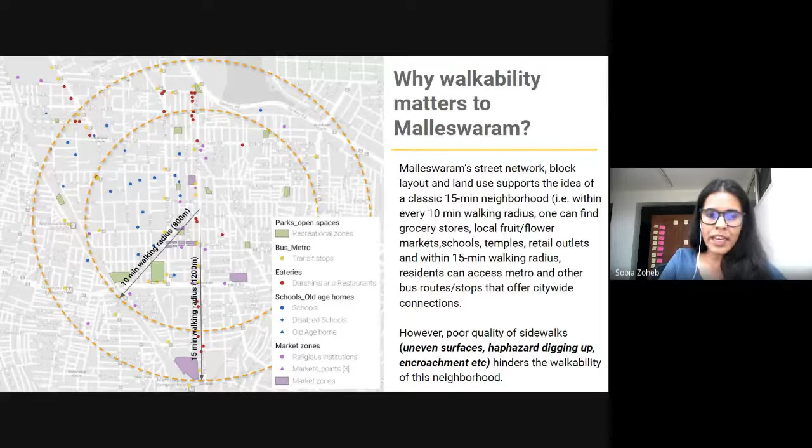Yet we still need to pull out our private vehicles to traverse this neighborhood, only because it's barely walkable. That became a touch point for residents, who started pulling out multiple issues. This happened when we made the proposal, trying to capture from citizens what exactly is going on here and how people are actually traversing.

We realized the majority of people do walk for their neighborhood trips and recreational trips. Yet there's a demography above 45 years old, many of them elderly citizens. So we tried to understand their challenges, and how people actually associate with the streets.

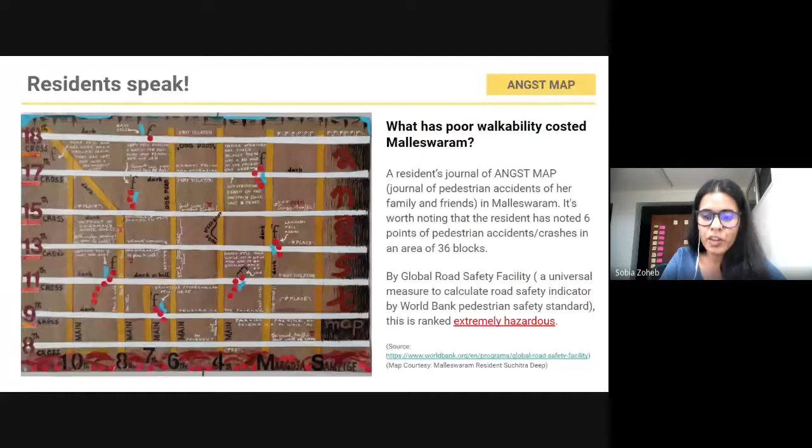This is an angst map done by one of the residents, about feeling unsafe, having pedestrian accidents and crashes across almost every other location, and really high footpaths. From there we went into mapping with residents to understand where this occurs.

As we moved in, we realized Malleswaram had huge potential with the TenderSURE roads meant to come and the existing Conservancy lanes. These bottom two images are of the Conservancy lanes.

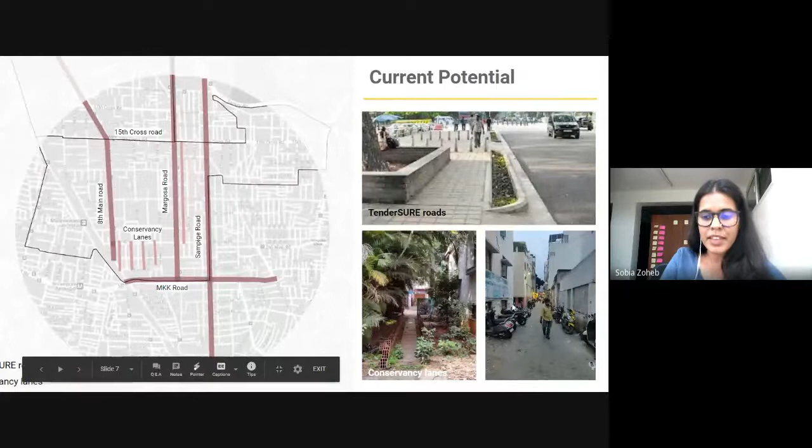We then coined a vision for Malleswaram, where the intent was to create well-designed slow-ways leveraging the existing Conservancy lanes. What you see in red are Conservancy lanes, which can be dedicated to prioritize movement of pedestrians and cyclists within this 15-minute neighborhood. Effectively, we were looking at 11 kilometers of road, out of which 3 kilometers was just Conservancy lanes.

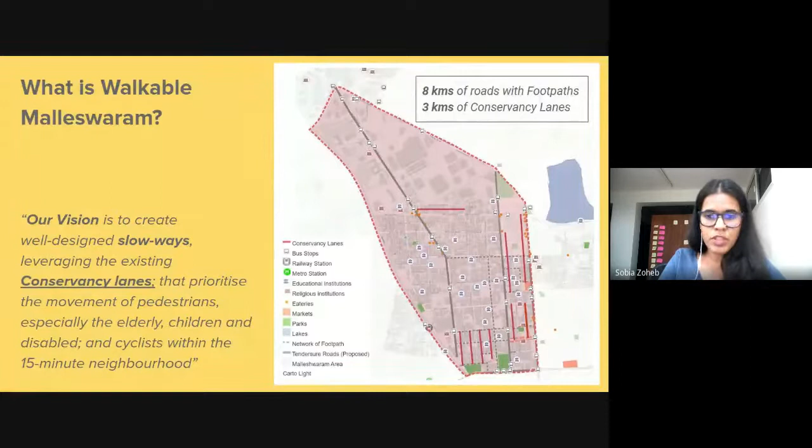We have a live website, and I urge you all to follow the project through that. We've made the project public so more people can get involved. We've just culminated our walking audit and are collating this data, where we had over 60 citizens, designers, architects, and students come map the footpaths and conservancies across the network.

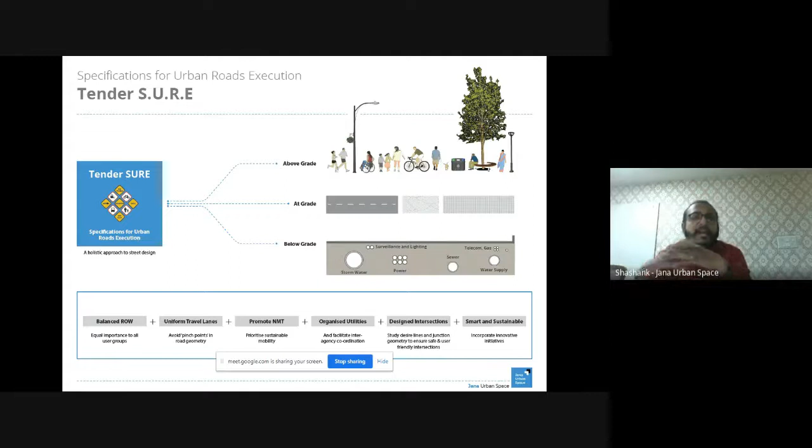What sets TenderSURE apart is that it looks not just at the at-grade level, which is what we call the surface level of your streets, but also at what's happening above it and below it. That's really, I think, what TenderSURE critically solved, which was very lacking in our cities back then.

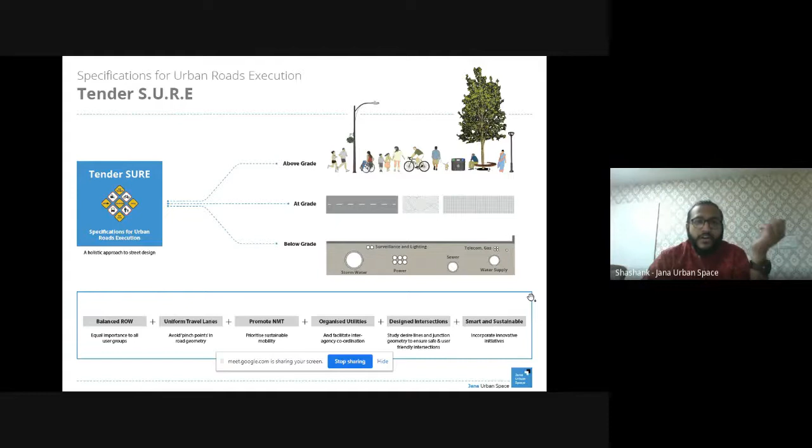We took a six-pronged approach to the design of these streets. The first is to balance the ROW, that is the right of way from compound wall to compound wall, and we want an equitable distribution across that ROW. We do not want what most streets have right now, where cars primarily get dominance. We wanted to rethink that, and in that process give back spaces where we can to pedestrians, cyclists, and other users of the road.

The second thing is to have uniform travel lanes, because one thing we see in Indian cities is suddenly widening travel lanes. It suddenly becomes 3 lanes, then 2 lanes, then one lane. That just doesn't work, because you get pinch points at multiple points in the road, and that funnels traffic into a specific point and causes a lot of traffic jams. So that is another big point, uniform travel lanes.

The third is to promote non-motorized transport, that is your bicycling infrastructure and even new mobility options that are coming about. This is basically promoting any sort of sustainable mobility through the street design.

The next is to organize the underground utilities, which is a big part of what made TenderSURE successful. Right now it's very haphazard. There's no clear definition of what lines go where, and it's quite a mess under the road. If you dig down into any of our roads, you'll find a hodgepodge of utility lines, and even the agencies don't necessarily know where their lines are. So organizing and fixing that was a key part of TenderSURE.

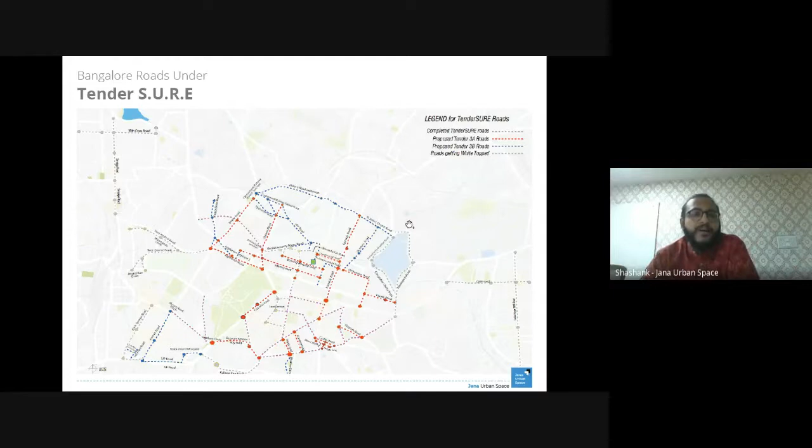Coming to Bangalore specifically, TenderSURE roads are primarily limited to the ABD as of now, but we are expanding actively into other places as well. A big part of what we're very proud of is that we managed to do about 39 kilometers of cycling tracks that go along with these roads.

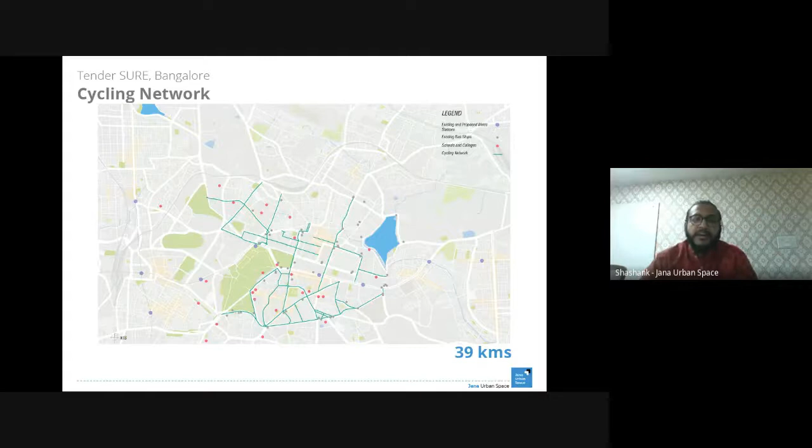There have been a lot of learnings in the process of what works for cycling tracks, whether we can provide it along with footpath users, or do we have to segregate it? Do we put it at the road level or the footpath level? A lot of testing and trying has happened, and we have now arrived at what works best. And of course the key point of what we're discussing is walkability, and the pedestrian network is quite comprehensive. We honestly think Bangalore is one of the most walkable city centers in the country.

You can see that the priority here is giving adequate crossing, providing bollards so that you prevent entry and exit of vehicles onto the footpath, because that was part of the whole learning process we had. We found that when you gave regular ramps leading up to the pavement, you ended up having parking on the footpaths, and vehicles like two-wheelers using it for short bursts. So that's what led to the bollards you see now. In a way, the bollards have become part of the character and fabric of Bangalore, because especially around the city center, even the new Tender SURE roads being done by the BBMP have that trademark bollards on them. I think that's become almost like an identity of Bangalore.

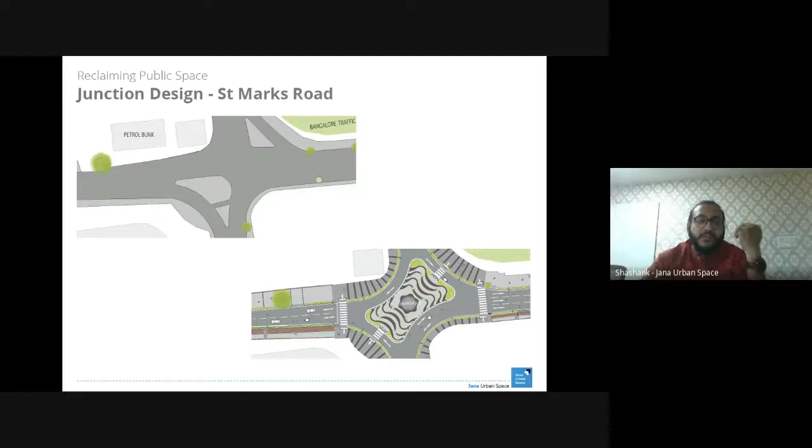Just by looking at desire lines, looking at the way traffic moves, understanding how pedestrians cross the roads, how the various user groups travel through the space, we are able to condense the travel lanes to only the desired parts, and then give back the rest of the space to the city, and create successful public spaces in the process.

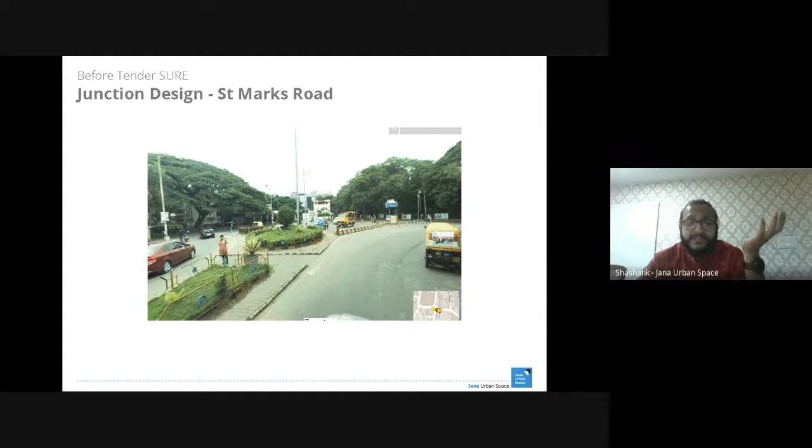So this is what that junction looked like before - it was a nightmare for pedestrians and cyclists in general, and this is what it looks like now, which is a lot cleaner, neater, with a better division of the right of way.

So this is what Tender SURE, the roads look like. Again, there's another example on Residency Road of what the road looked like. You can see people crossing randomly - there is no real division of right of way at all. It's a very inequitable street.

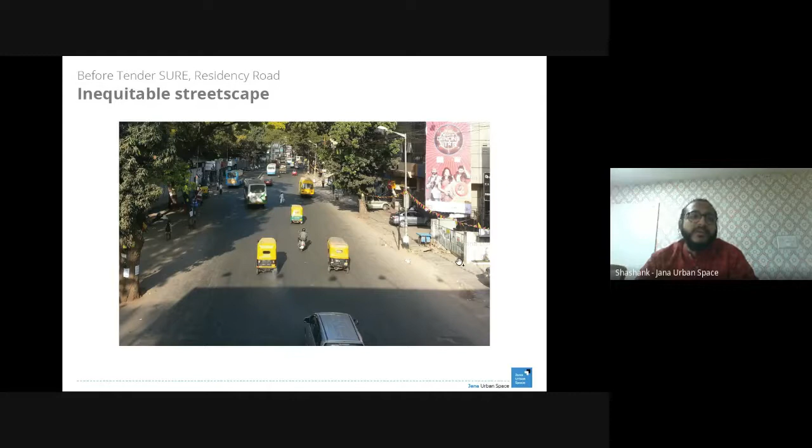And again, the bollards, as I was saying, creating a safe pedestrian experience using those bollards, providing NMT infrastructure like cycle tracks - this is something we're experimenting with. We have done it in the initial Tender SURE Road.

We had done a lot of landscape strips. We are now trying to convert them to bioswales, which basically take in your rainwater and absorb it, letting it percolate slowly into the ground. So bioswales is something that's part of the whole learning and exploration process we're currently working on.

This is another example of reclaiming public space, the cash pharmacy junction, which is a pretty critical junction here on Residency Road. Right at that junction, we realized that the actual path vehicles need to take doesn't require all of this land to be asphalted. So can we tighten that up and create a public space that is given back to the community?

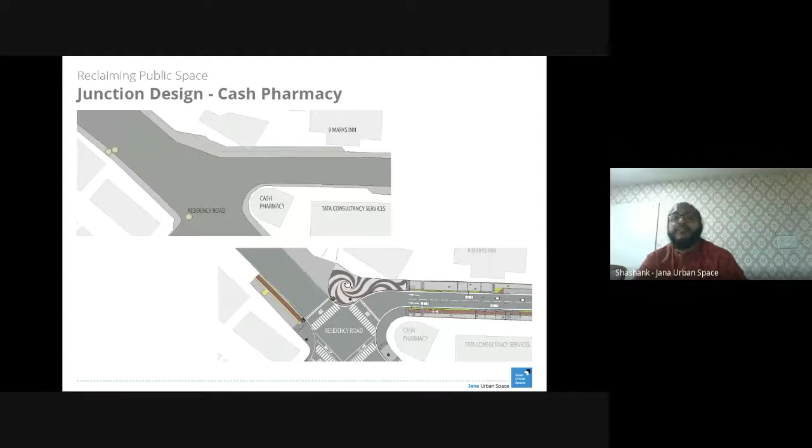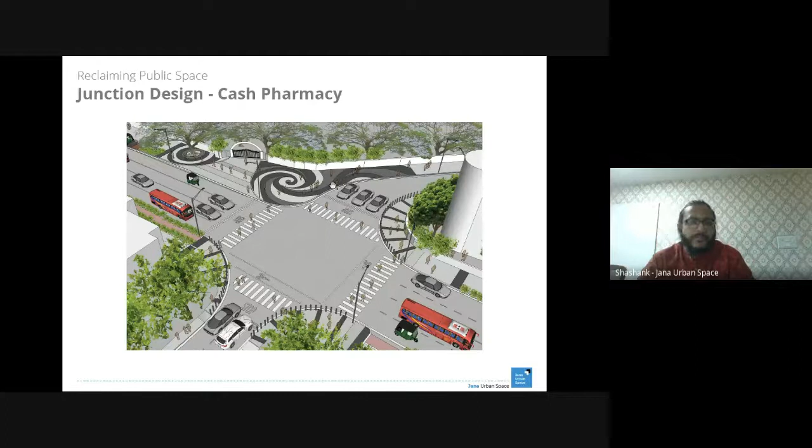In fact, right next to where this public space is, you have a very large school. So we actively wanted to create something where people could use the space outside as waiting areas - that's the school there - and we wanted to create this plaza with waiting spaces for parents, drivers, whatever it may be. So that's what it currently looks like - basically taking away what used to be asphalted and giving it back to the pedestrians.

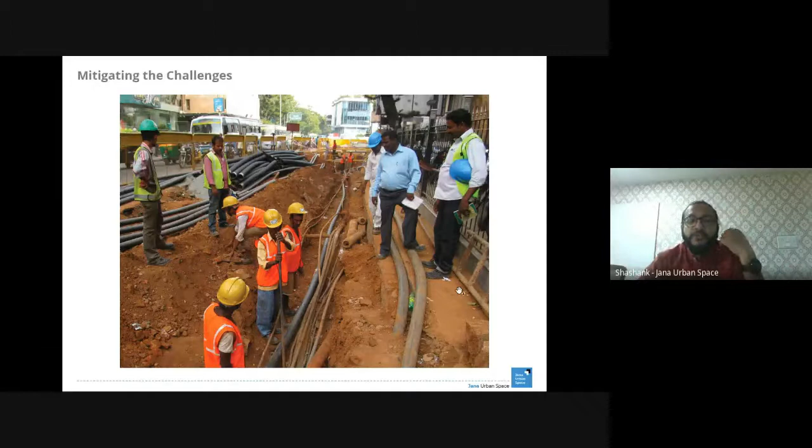So from an implementation standpoint, I'll quickly run through some of the challenges we faced. One big thing is we did not want to make the entire road and right of way unusable during the time Tender SURE Road was being constructed. So we initially did it in segments of 100 meters at a time to try and minimize disruption and allow traffic flow to continue through the road. That was a big challenge, certainly, because it required a lot of coordination with the traffic police and other agencies involved.

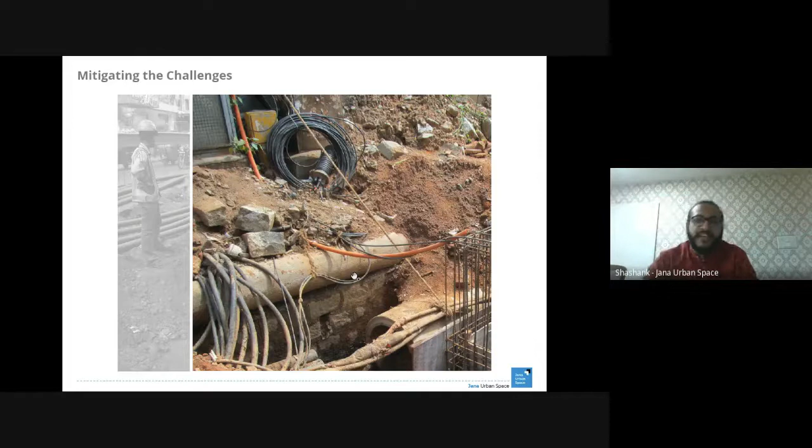This is an example of what I was telling you about the hotspots of underground utilities - everything just goes everywhere underground. They lay it without really thinking of the larger network. So fixing that was a big part of what we did, and this is an example of the cleaned up underground utility network with dedicated ducts and regular inspection chambers. That's another big thing we've done.

And of course, there's a lot of participatory process. This is not just Jana decides to do it and Jana does it - there is a lot of public consultation.

There's a lot of agency involvement. A lot of people have to sign on, get on board, understand what we're trying to do, and be part of the process. It's very rewarding once it actually gets executed.

Coming to some of the learnings, things like we need those bollards. Even for instance, the paver blocks - something we initially did as loose fixed pavers because we wanted it to be removable whenever there needs to be any digging up of utility lines. But what we then noticed is that we didn't actually need loose fixed pavers because we had provided enough inspection chambers for the utility agencies to access.

So we've now transitioned to perfectly fixed pavers, because otherwise we were having this problem of rodents coming beneath the sand and creating channels, and when any of those channels collapse, it affected the pavers on top. So now we've moved the transition to fixed pavers, but almost none of the Tender SURE roads have ever been dug up since we've converted them.

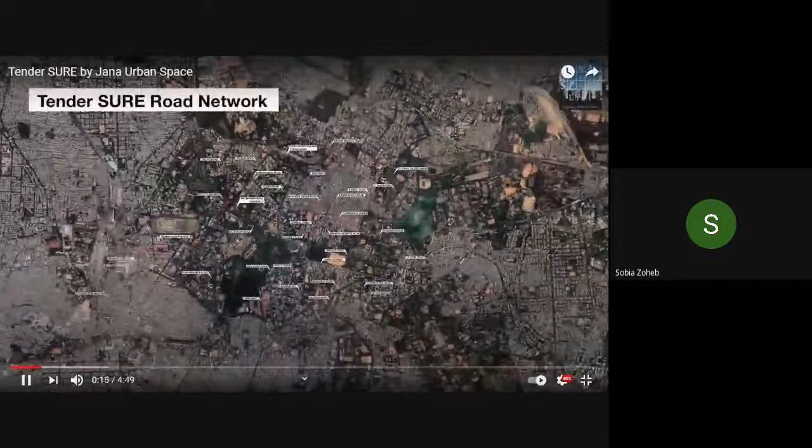Actually, I don't think it's audible. Yeah, he's just checking. Okay, sure. Would you like me to give it a try from here? Sure, please do.

Can you just let me know if you can hear the audio? Yeah.

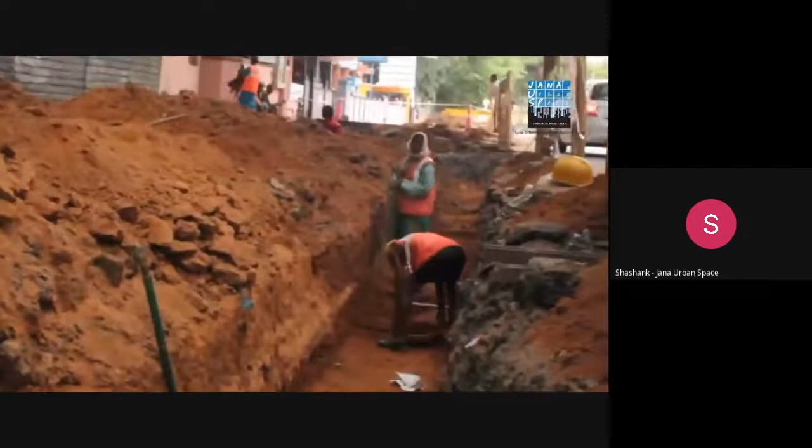The road is actually the conduit for all the other networks which impact my quality of life. That's the underground network which is supposed to collect all the rainwater and prevent flooding. That's the one which brings in my water supply, power, data cables, etc. and carries out my sewage. So the road becomes this conduit which networks the entire city.

But today the municipality comes and lays the road. We have multiple agencies waiting in the background. They seem to wait until the road is laid by the municipality, then come and dig it up, one by one. So you're back to square one. That road, nobody would believe was done 6 months ago. Einstein said insanity is doing the same thing over and over, but expecting a different result.

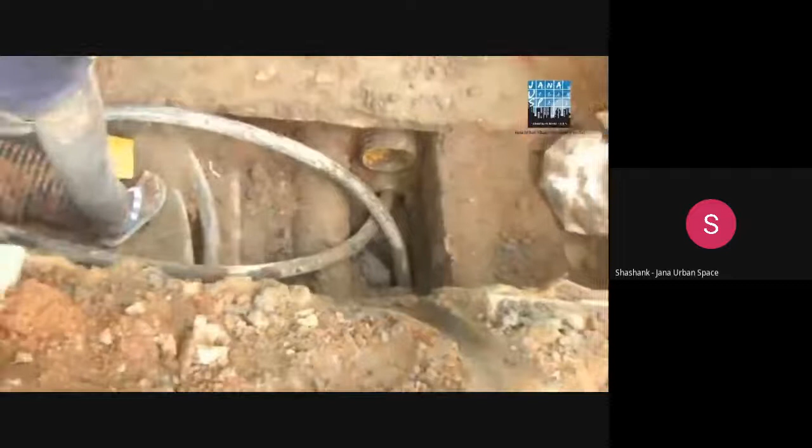Tender SURE fixes the design of the road itself, but also the design of the utility corridors. Every agency has been allocated a utility corridor with regular access chambers under the footpaths. No agency should dig the roads anymore. We started with saying no more of build poorly, cut repeatedly, rebuild poorly. Instead, let's aim for cut once and fix once and for all.

Tender SURE seemed to me a very good thing because for the first time we were looking at urban roads with much higher and better specifications which would be more sustainable. This is change that people can see. It dramatically improves their quality of life. It improves the walkability, revitalizes their neighborhoods, improves safety and security. It just improves the experience of the streets.

I believe that urban India, at least as far as the roads and cities are concerned, should be a completely different picture if Tender SURE specifications and the Tender SURE model becomes the basis for road making. I think it's a big leap forward.

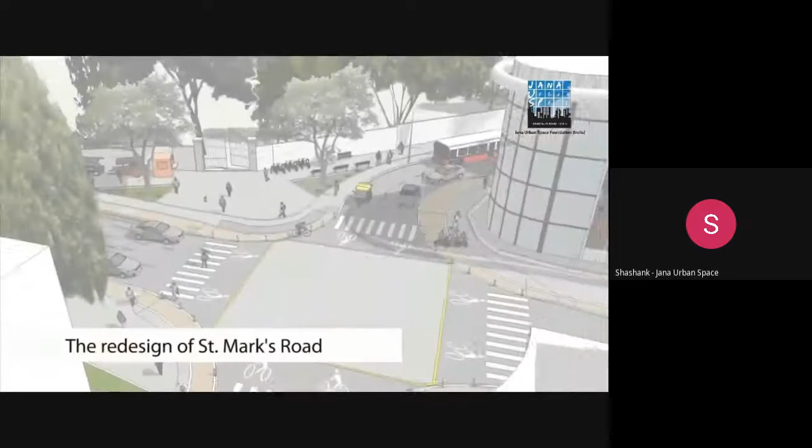Why such wide footpaths? Why has the road surface reduced? Well, it's like Bernoulli's principle. If you put plenty of water in a wide funnel, it will still drip slowly at the pinched end of the funnel. So also, if you let in 100 cars at the widest part of the road, but only 10 can go at the narrowest, we have not eased traffic. We've simply created a traffic jam.

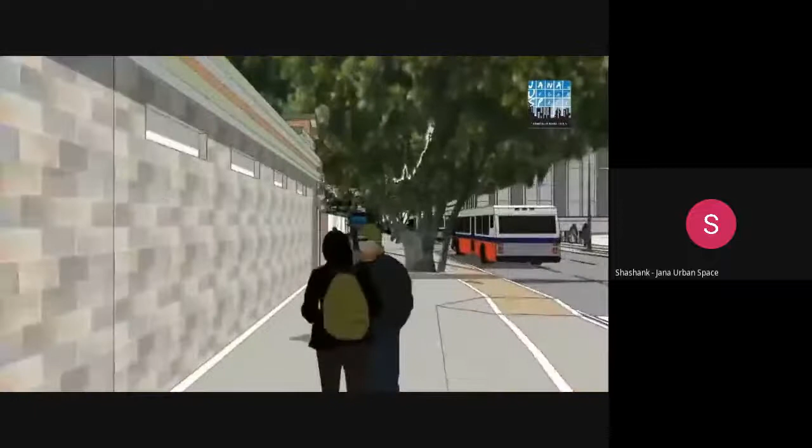Our city roads are filled with such traffic jams. What we have done in Tender SURE is designed for the narrowest part of the road and given the rest for parking, bus space. It has dramatically improved the flow of traffic. And in spite of zero land acquisition, we have protected all the old trees in this project. We have provided space to accommodate the same number of street hawkers.

I'm working as a project coordinator in this project. This project is first of its kind project in India, which has really inspired us, and we have learned a lot of things from this project.

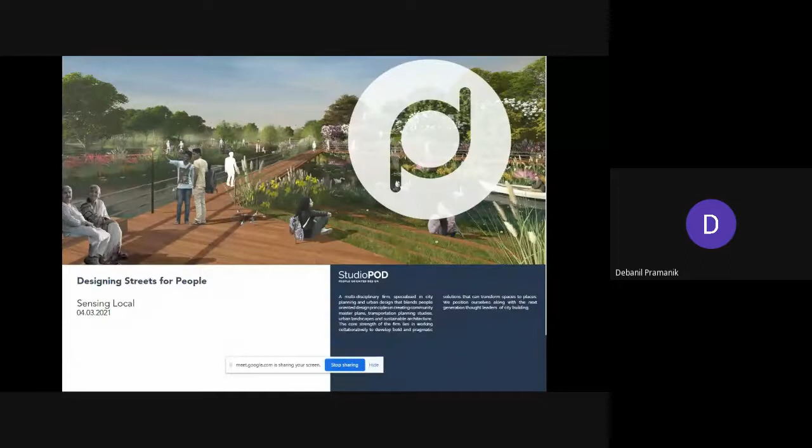So yeah, I'll try to keep it a little quick since it's almost 7 and I know everyone has to get back. With StudioPOD, we are a Mumbai-based urban design studio, and we do a lot of different kinds of urban design and urban planning projects. We also get involved with participatory planning and engagement that informs people about the state of urban planning and the rights they have as citizens.

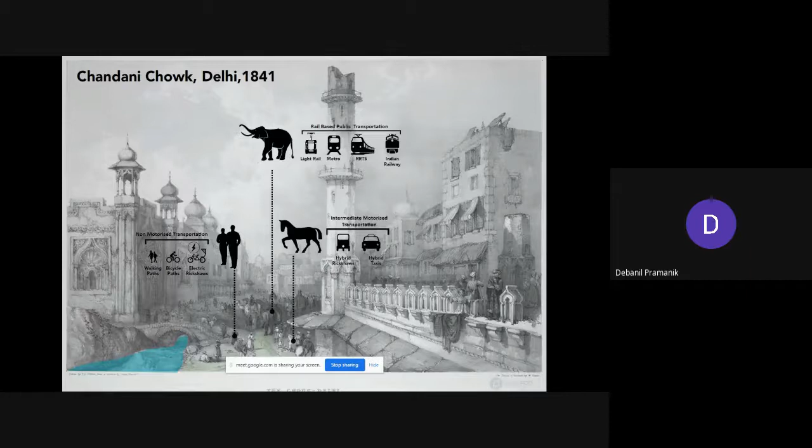Keeping that in mind, we like to go back to two images that speak a lot to us. This is Chandani Chowk from 1841. What's interesting is the amount of space the streets had for the concept of Hathi, Ghoda and Palki. The same street was used by people, Hathis and Ghodas - the equivalent today would be a Hathi as rail-based public transport, a Ghoda as intermediate motorized transportation, and people as non-motorized transportation. This was part of our history.

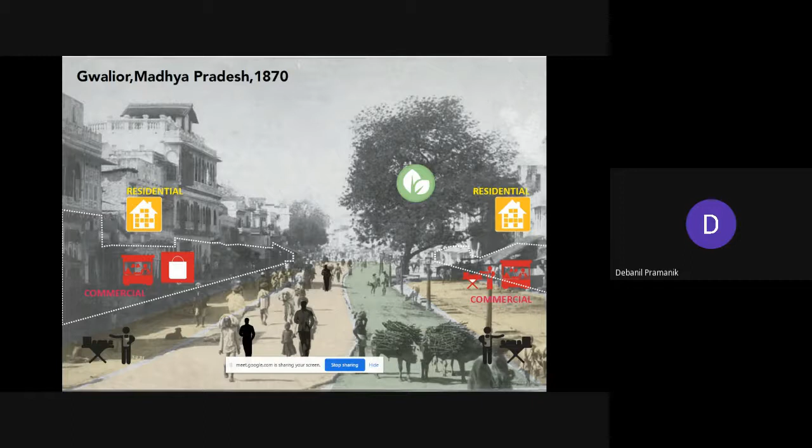Taking inspiration from this and our urge to inverse the pyramid, what we'll do today is talk about our approach rather than specific projects - some of the approaches we've taken across different projects we've been engaged with for some time now.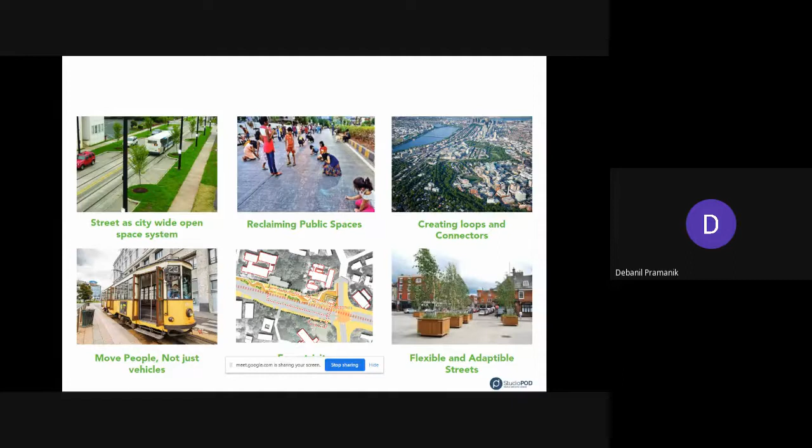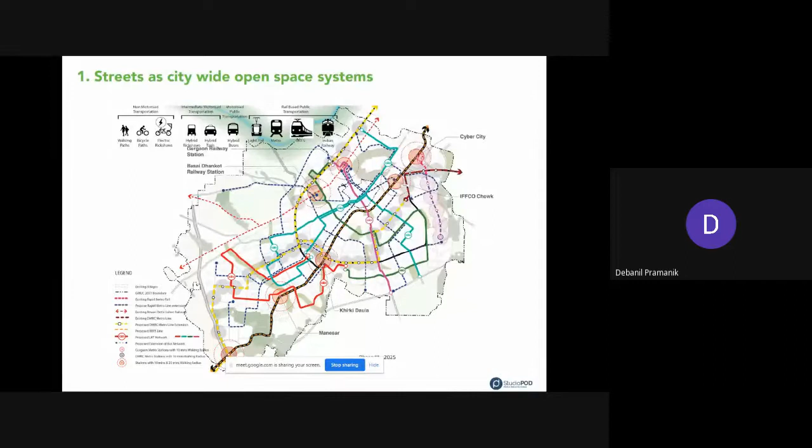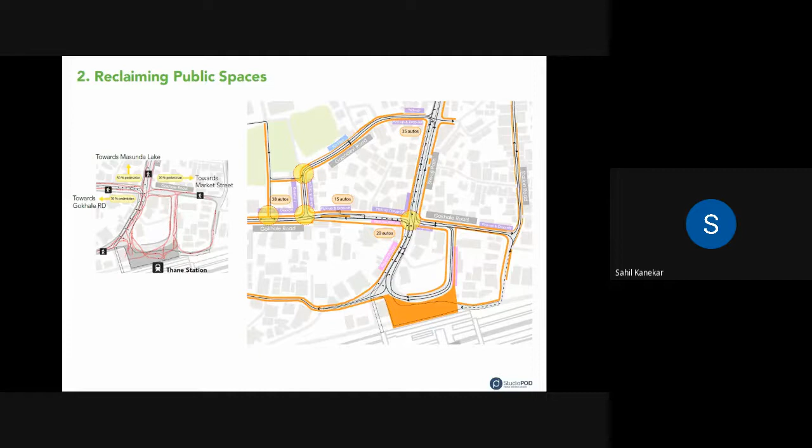We tried some design exercises there. If we go to the next slide - so this is where we tried to achieve as much walkable space as possible for pedestrians once they get out of the station, while also correcting the geometry of the ROWs to create a seamless flow of vehicle movement. The red demarcated flow is the figure-8 loop pattern we've created, which works like a conveyor belt system within the station area. All the IPT stands, whether for shared auto systems or metered auto systems, are placed around this loop. By doing this, we were able to achieve a lot of walking space in this area.

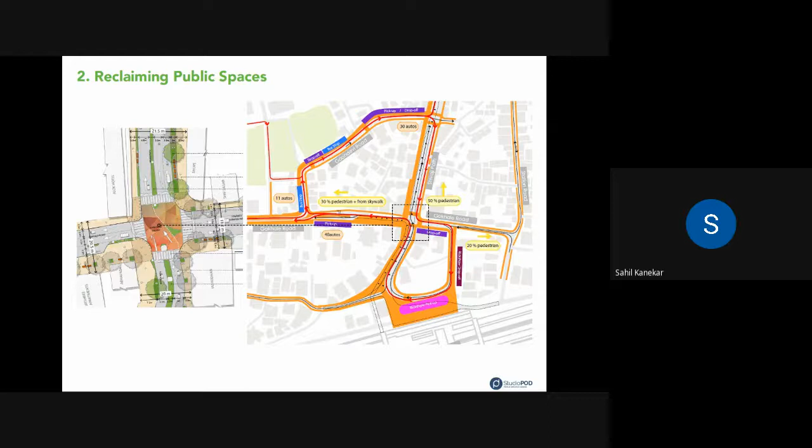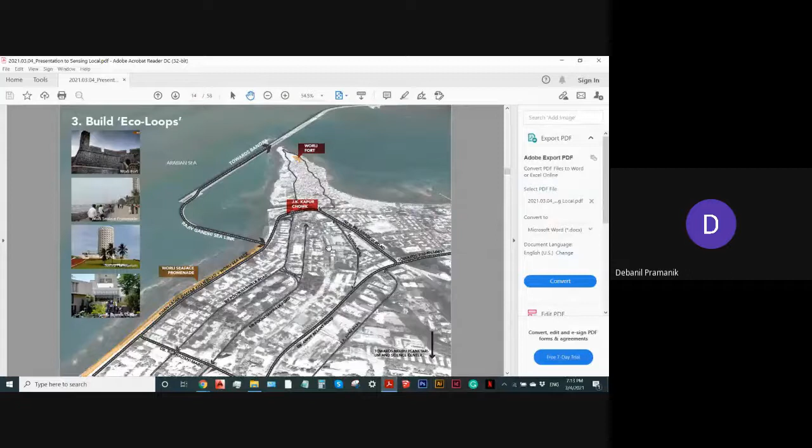Sorry for that. This is something we also explored, the idea of creating loops, which comes close to what Sobhya was talking about earlier, the conservancy lanes in Malleswaram. This is Worli, a pretty famous area in Mumbai. You can also see the sea link which connects Worli to the area of Bandra in Mumbai.

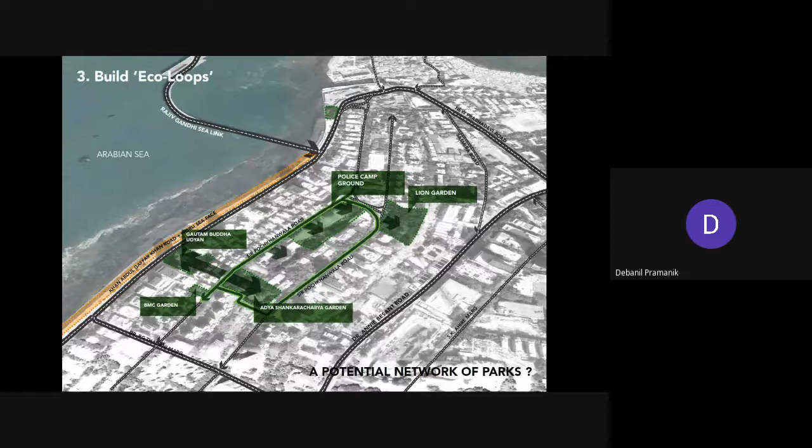This approach showed us that we always had a set system of parks in Worli, highlighted in green. Only when we looked closely did we realize there's a possibility of linking these parks and creating a loop around them, an eco loop focused on people walking and cycling. This led us to acknowledge certain hidden links, highlighted in red, equivalent to the conservancy lanes Sobhya was talking about. These are thoroughfare routes used by pedestrians, but only residents of Worli actually know about them.

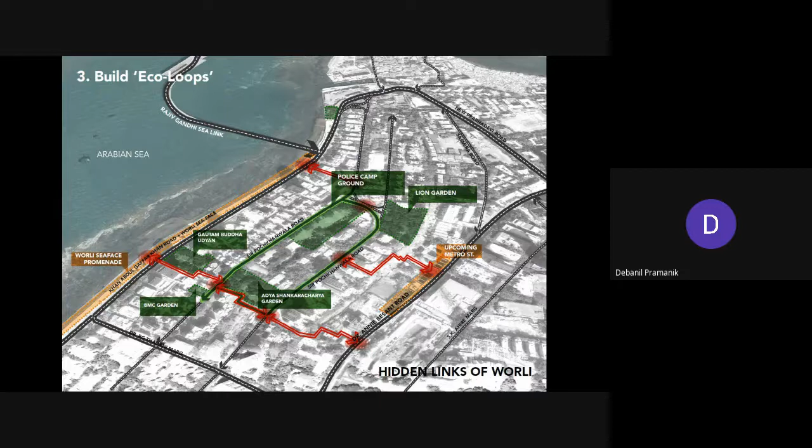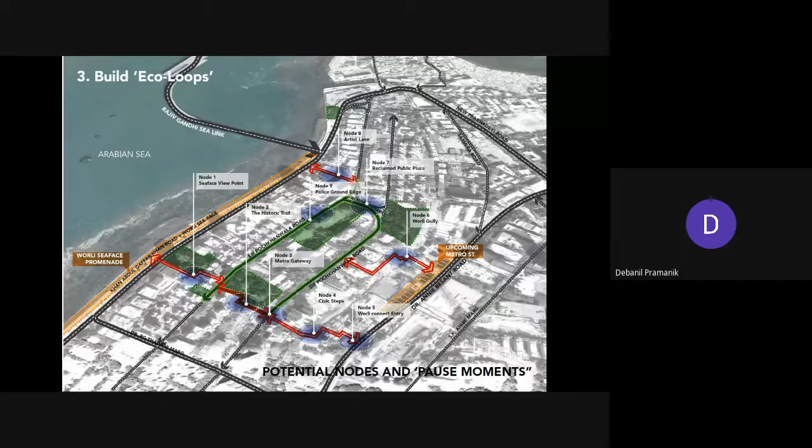These are things which the average Mumbaiker will actually not know about. So this became our opportunity to create this integrated loop system, which would allow pedestrians to go from Annie Besant Road all the way to the Worli Promenade, which is along the Arabian Sea. And of course, we did that by looking at certain pause points or nodes that could be important for people along these loop systems.

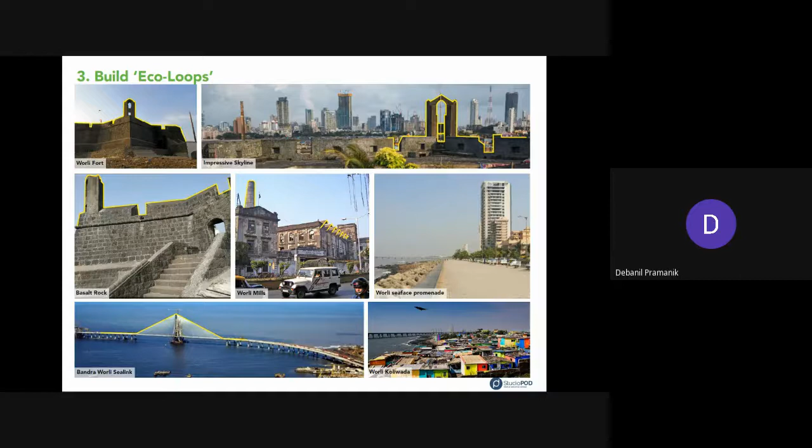It's very important to have these kind of projects also be visible. The first thing to visibility is that we always try to approach and borrow elements from design which is already present in the ecosystem of the space. So here are certain historical references or historical buildings which are a part of the Worli cityscape. We got inspired from them, and then we derived certain motifs from there, which were used extensively throughout our designs.

For example, the Rangoli pattern, which is used almost in front of every household in Maharashtra, was also something which we got inspired by. And then it translates into making these connectors more usable for the pedestrians. So we got inspired by the Worli Fort pinnacle that I was talking to you about.

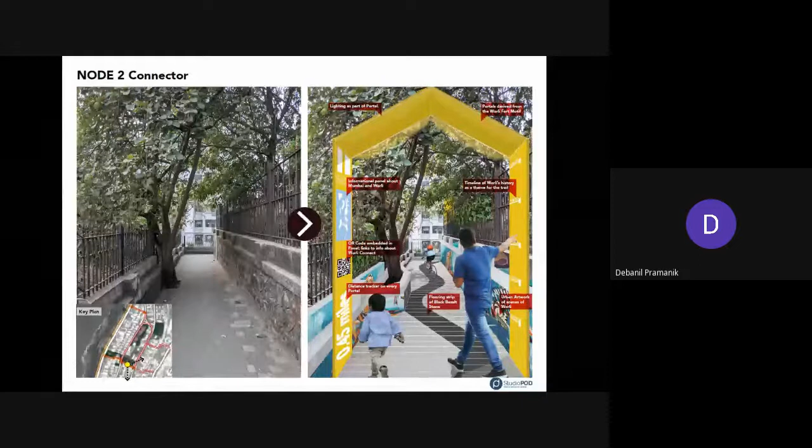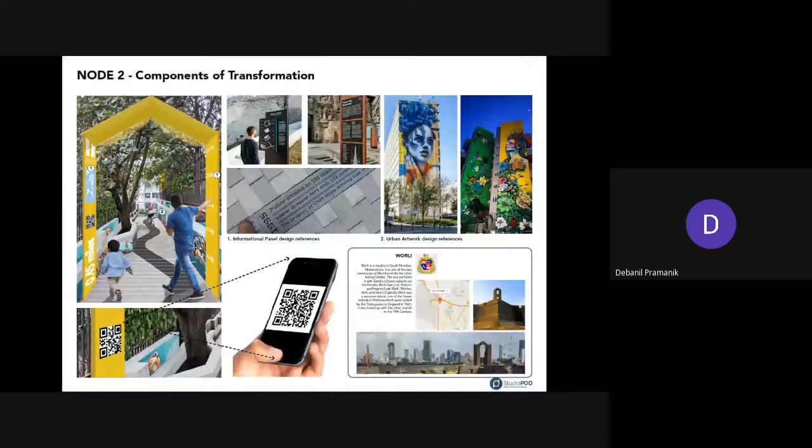And then there are certain simple elements like including a QR code, which gives you information about Worli as a precinct, as a part of the city, its history. All you have to do is have a smartphone or a device which allows you to scan the barcode, and you are privy to all these interesting information and tidbits about Worli.

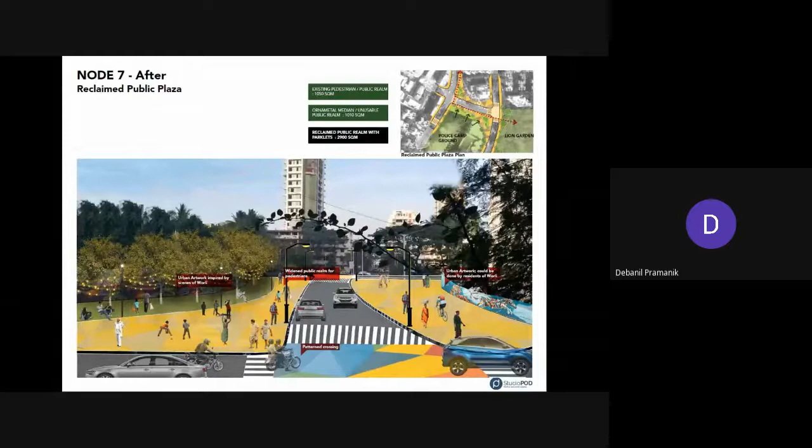So similarly, there was another node where we actually tried reclaiming a lot of public space. This is done by actually road dieting, making sure that something which was around 1,000 square meters of public space becomes almost 2,900 square meters of public space. And this ties in with our idea of reclaiming public space that I've already presented before.

What we've also tried to do is revive the culture of water transport that Dal once had. It is lost right now, mostly used by tourists, but integrating that as part of a multimodal transport approach to this vision plan also helped us give access to people to the water. Similarly, a system of boardwalks that we created integrated pedestrian movement, bringing them closer to the beauty of Dal, which is all because of the lake that is over here. On the other side, the system of boardwalk gives you access to the biodiversity zone.

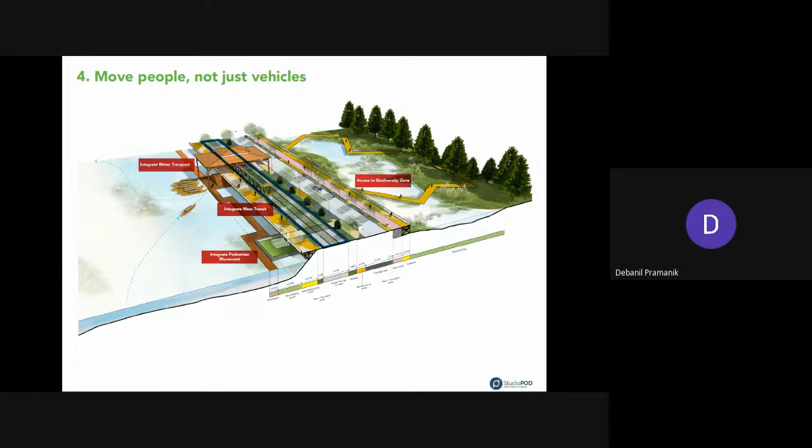So the idea here is that we have to take every opportunity that we get to not only look at movement for vehicles, but also to understand that it is an opportunity to move people and give them back lost land. And similarly, this project then developed further.

There were a lot of lost linkages which used to allow people to directly take their shikaras, the boats, all the way to the Mughal gardens of Shalimar Bagh. This is the present condition of that particular canal, which used to connect the Mughal garden to the Dal Lake. And what we've done is tried to propose something which actually revives that lost linkage.

Similarly, with the revival of water transport, near Hazrat Bal, which is a famous shrine in Srinagar, there's an existing bus stop.

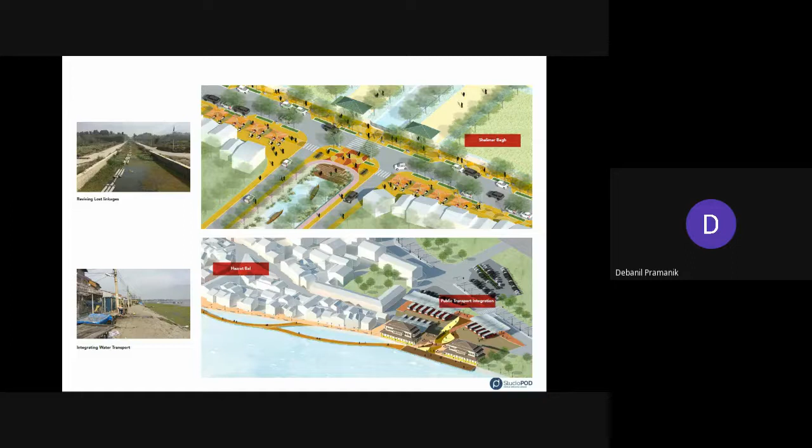The idea here is to integrate it with a ferry terminal or shikara terminal, which becomes an integrated mode of transport for the city of Srinagar. Every opportunity has to be made use of.

This is another project that came to us, for the city of Pune. I have my colleague Satish here who's going to talk a bit about this. Good evening everyone, I'm Satish, an urban designer working at Studio Pod.

The context of this project was to work around the metro station that was proposed, to create public space. The approach we took was to rethink the entire street stretch and its alignment, rather than using a center line approach to develop the street. We went for an off-centered approach where the entire ROW was shifted towards the southern side to create more space for the public around the metro station.

This is how the space is right now, with 4 pockets of open space on either side of the metro station that could be tapped into to expand the public realm. Our approach was to take the space on the southern side and shift the ROW downwards, so we could get more space toward the northern side and have a contiguous open space directly integrated with the metro station, providing better access, a grand entry to the station, and better connectivity with the surrounding neighborhood.

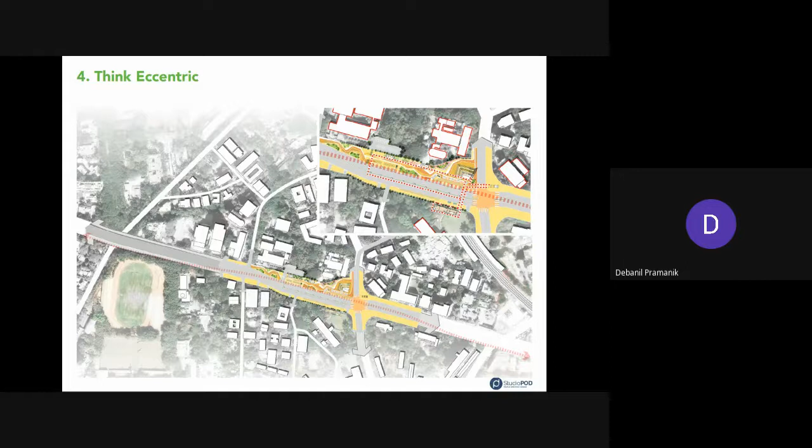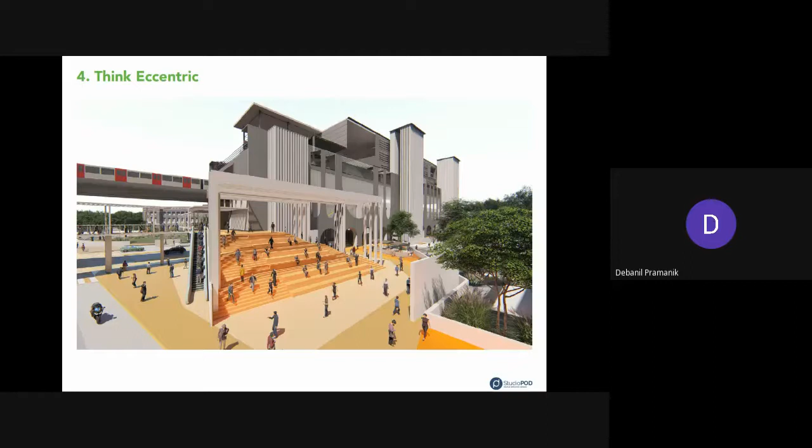There's also a junction right next to it, and we looked at how the whole system can tie together and act as a grand gesture, rather than just being an approach to mundane infrastructure in the middle of the scheme.

They had some really horrible experiences, and that led us to design the street from the perspective of safety for women. The concept was making a street that works for everyone.

That was one of the important narrations we took forward, primarily designing a street for all which is safe.

Taking that approach forward, we worked with 2 major parameters: the walkable meter and the safety meter. We identified different parameters for how walkable and how safe the street is, identifying those elements and how to deal with them in the cross section of the street and in the arrangement of different functions along it.

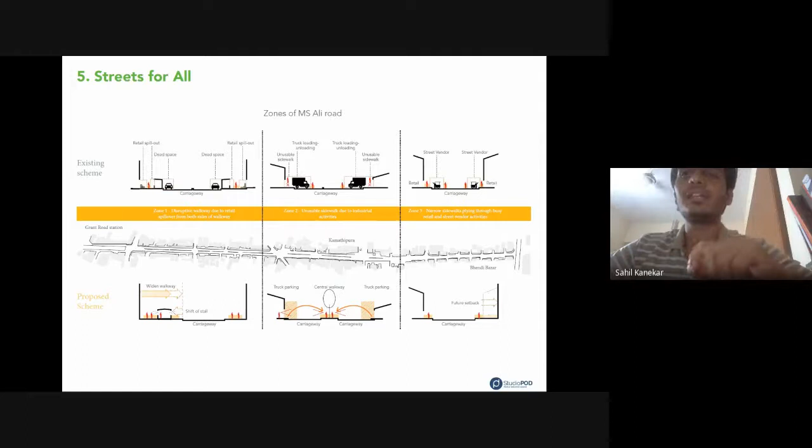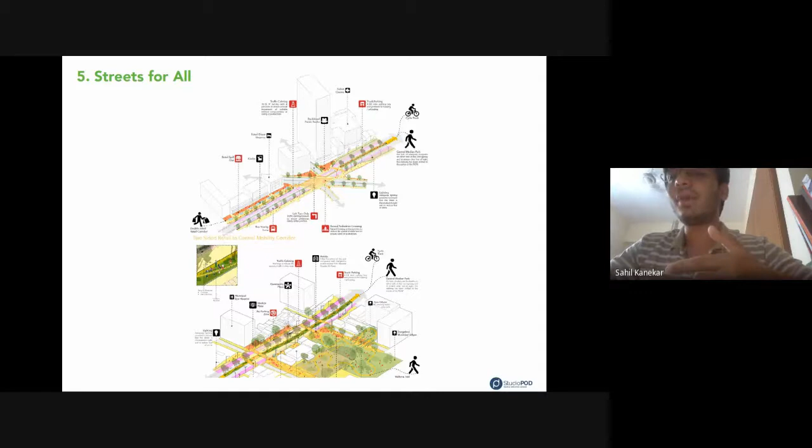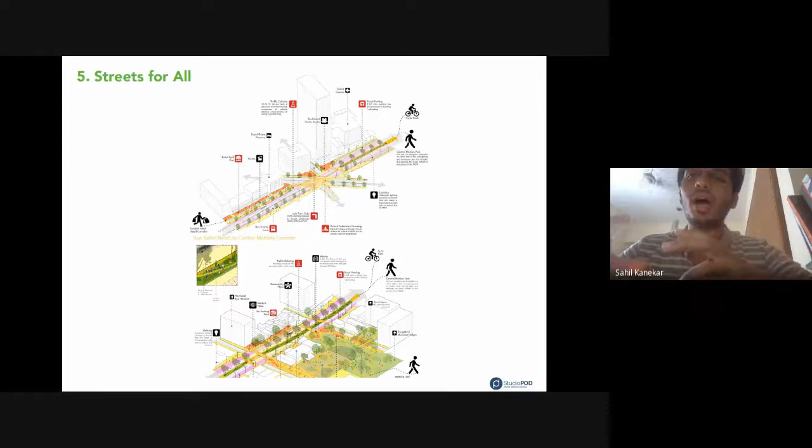While shifting the pedestrian walkway from the sideways to the center, there were certain parks along the way, including a women's-only park and a children's park, all of which had access through by-lanes. So our approach was to open up the compound walls and make the park visible, letting that cross section of the street open into the park, with the park's activities spilling over onto the street. So along with designing for women, it was also for elderly people and kids, while also considering the trucks that need to load and unload at the same time.

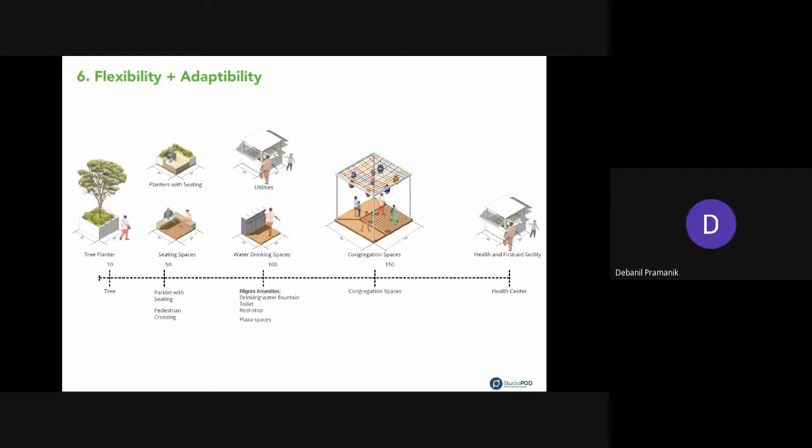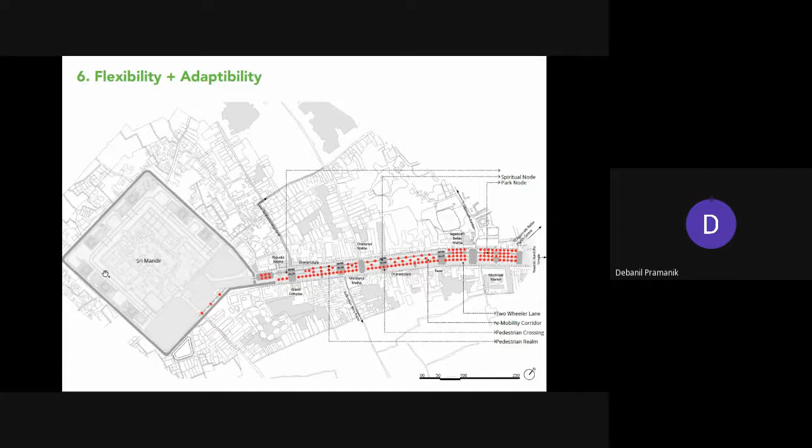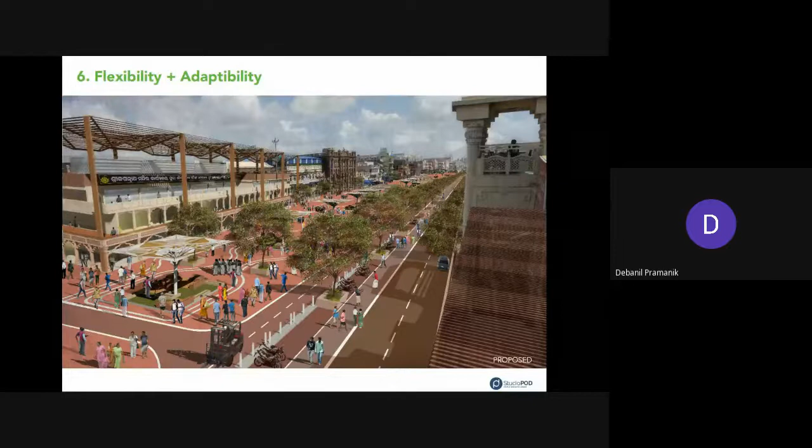So that was the challenge we had to overcome: not fixing anything to the ground while still providing a comfortable public realm for the pilgrims. The red dots represent multiple pots that would align around the parikrama area around the temple. This visualization shows movable anchors that make the space greener and well-shaded, protecting pilgrims from the harsh weather of Odisha. This was a competition entry, and even though we're not doing this anymore, the way it would proceed would follow similar lines because of the unique nature of the site.

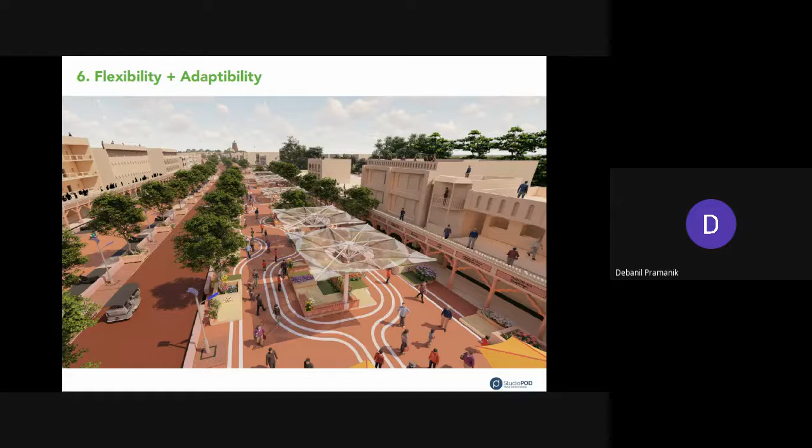Finally, after talking about all these ideas, when things get real, it really starts getting exciting, particularly for a project we're working on right now, which is a public realm development but privately funded. When this happens, there are multiple challenges on ground, starting with coordination between different municipal bodies and allied departments, since we're not approaching through the government. It has to be done individually with all of these ULBs, which becomes extremely complex. But while doing that, we want to establish a pedestrian-friendly street at the heart of Mumbai, reclaiming space between high volume traffic and the existing infrastructure on ground, which may or may not be malleable.

So the challenges brought us to Senapati Bapat Marg in the city of Mumbai. We have challenges of haphazard traffic movement, unsafe pedestrian crossings and pedestrian movement, and on top of all that, there are multiple services, including storm water drains, electrical and communication lines, which may or may not be able to move into a trench or be amended.

And again, in the context of India, we do have a lot of encroachments along the footpaths. There are a lot of unauthorized street parking, and even though the carriageway is almost 12 meters wide, the usable space ends up being 1.5 lanes or 4.5 meters, which in itself is counterproductive.

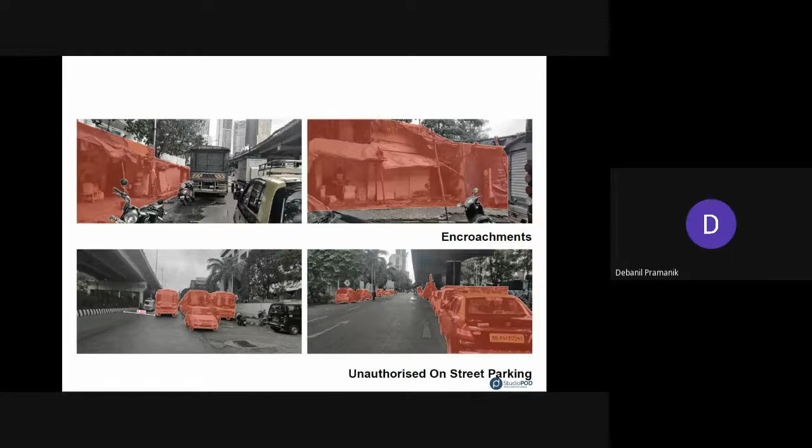So, mapping the whole issue along the entire stretch of the SP Marg area, we figured out that each of these particular problems have to be addressed in a different way and through different departments altogether. So we had to get the traffic police on board, the private bus owners who are parking their buses illegally there, they have to be moved to some other places. MCGM, of course, have to be contacted for the coordination of the whole thing.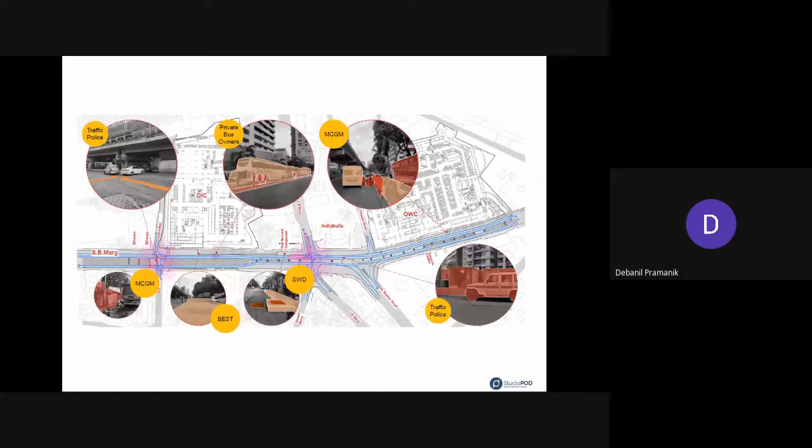And on top of that, we had services of SWD and also BEST lines, electrical lines running around. So it was an exercise of coordination and bringing everyone up to speed for a very long time before we could even hit the ground.

And the picture that you see is very interesting because when we started work on ground, MCGM decided that they have to expand their SWD lines, and literally they just started putting their trenches and the hume pipes and their chambers on ground, and they improvised on ground because they did not have a drawing to work with. So it was literally them digging up the site, figuring out the levels, and then putting the lines wherever it works to drain the water.

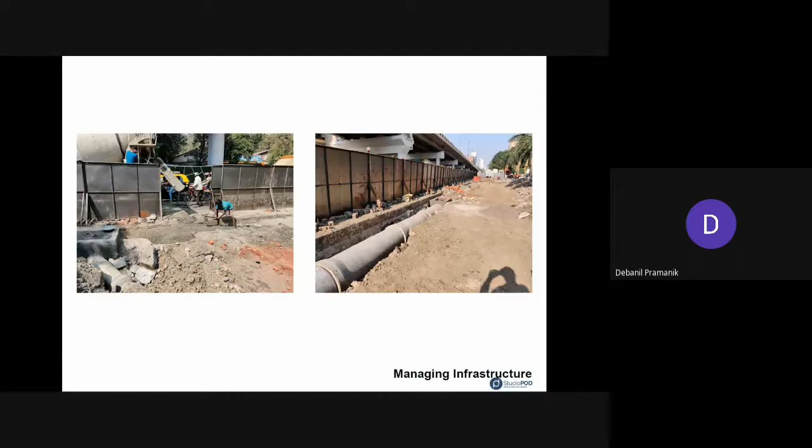And this really had to be accommodated into our design in several ways. And we also had a flyover in the middle of the street as well. And under the flyover are multiple MCGM and BEST structures, and they have to be relocated and given better infrastructure, which was the give and take.

So we take out the space for pedestrians while relocating them to a better space and giving them better infrastructure. So we were going for a win-win situation over there.

And the carriageway itself was really challenging because it had multiple surfaces, including asphalt and M40 concrete, whereas the M40 was the sacred element that could not be touched. So even if we are going for civil work or expanding the pedestrian realm, we'll have to overcome these challenges and figure out a way and technique to still do it permanently.

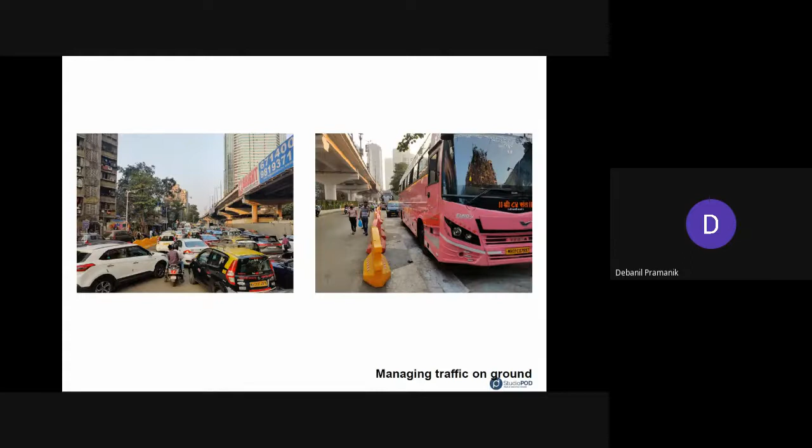And of course, managing traffic on ground was the most important challenge that we had on hand, and also managing the parking on the street sides, and how this can be streamlined was the main challenge that we had in mind.

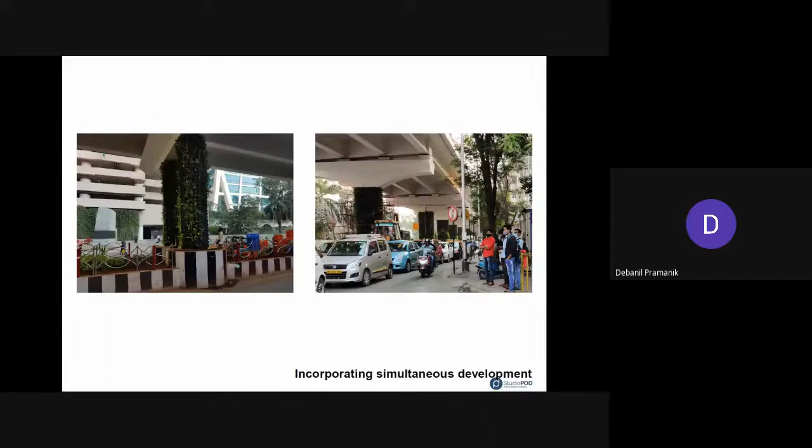And surprisingly, MCGM also decided to do some development along the under the flyover through these green walls, and it was good, it was a refreshing feel. So we decided to incorporate into our design in the later stages and evolve it to revolve around these interventions. So it was a lot of back and forth that was happening.

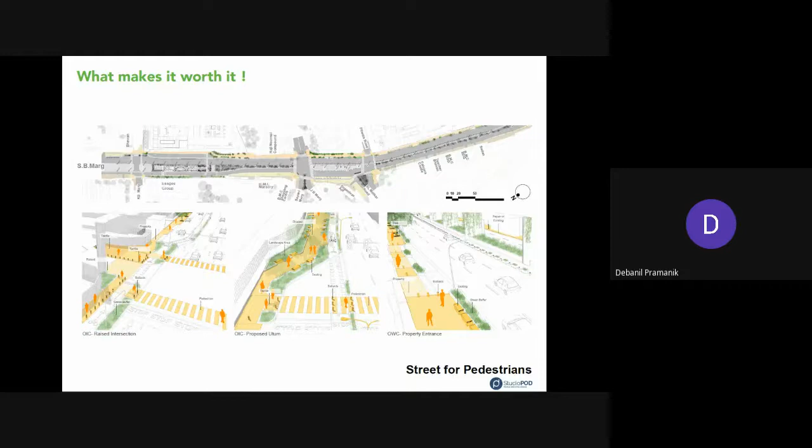And after all of these exercises and after looking at all of these challenges, we went ahead with the approach where the priority was to reclaim space for pedestrians, effectively increasing around 3,700 square meters of public realm throughout the stretch, which is uninterrupted.

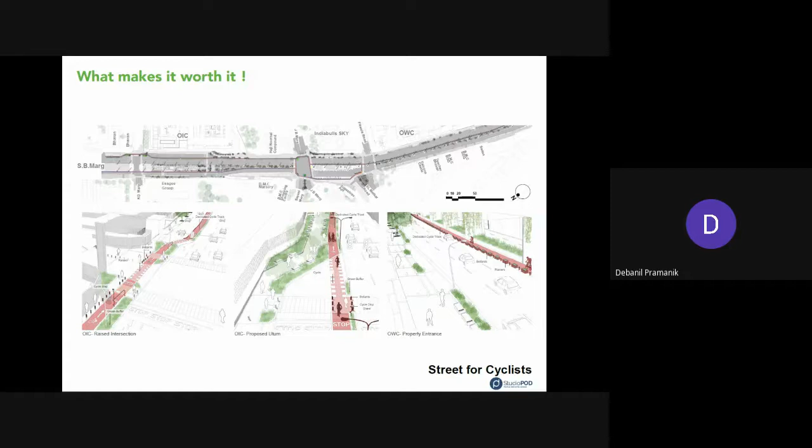And as a secondary layer, there is a continuous cycle track that would allow cyclists to seamlessly pass through the entire stretch. And finally, a streamlined corridor for vehicle movement, which would alleviate the congestion in the area.

And apart from these, we also reclaimed the space under the flyover, around 3,000 square meters again, which would be given back to the community after development.

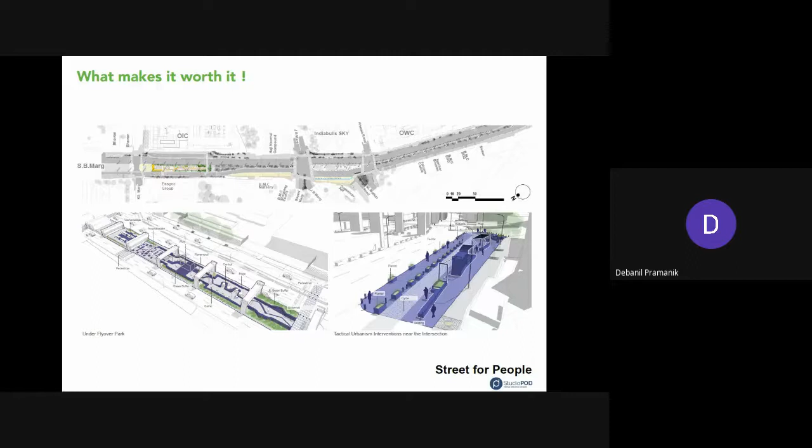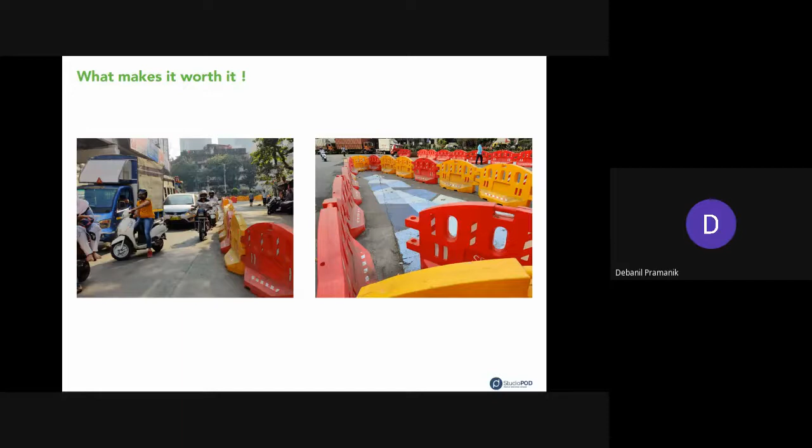So how did it work when we went on ground? The first thing that we wanted to test out was reclaiming the space, and it was a lot of back and forth, literally placing the barricades here, like 1 meter or half a meter apart, and slowly pushing it towards the carriageway.

And finally, what we could achieve was this: like on a Monday morning, peak hours, all the traffic is streamlined, and we see a kid playing on the other side of the reclaimed space, unsupervised, and it is still a very safe space for pedestrians. And we cannot wait to see this as a permanent intervention in the heart of the city. Thank you.

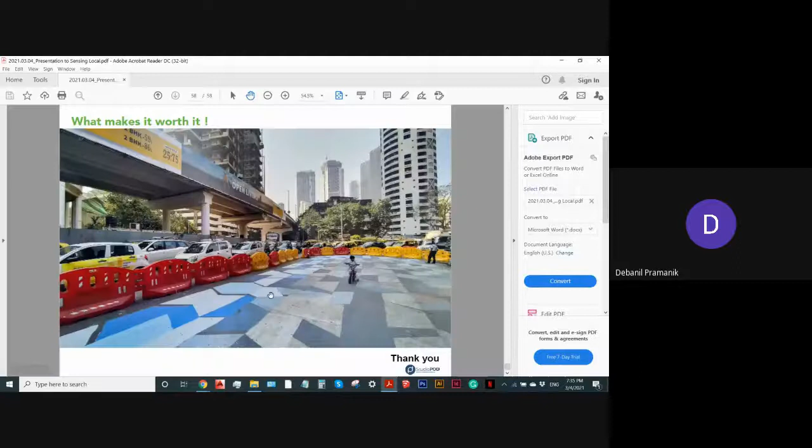Thank you, guys. That was an amazing presentation. It was great to understand, and I love the way you put it in terms of the design principles you follow. That was core to even starting design, and I think it's great to see where to start, what we formulate as principles, especially when we get into public space design. So I think that was really great.